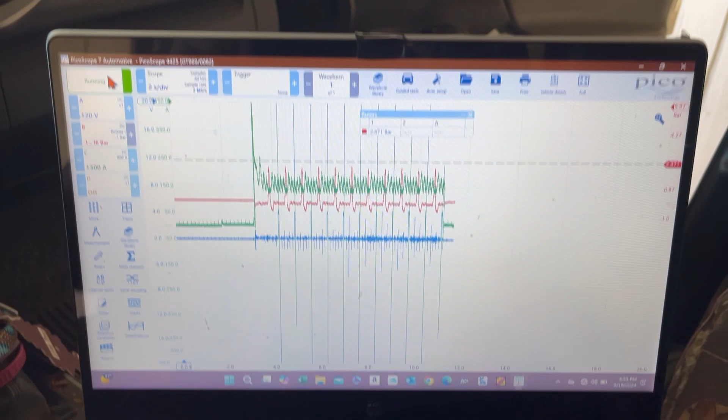Today we're talking about pressure sensors and pressure sensors in relation to misfire diagnostics.

So when would you need them? Why would you need them? Once you've exhausted all your resources and you've verified it's not a fuel issue, it's not an ignition issue, not some other component in the engine bay, and you've concluded that it's most likely an internal engine issue, well, this is where the pressure sensors shine.

When you pair pressure sensors with your lab scope, they're going to be your eyes into the engine. And this is one of the reasons I find it so intriguing. I have struggled quite a bit to gain what knowledge I have, so if I can save you guys that hassle and share something, you learn something, then it's a win-win for everybody.

I got called out to a 2019 Tacoma with some drivability issues, and I thought that this would be a good case study to just kind of give a general overview.

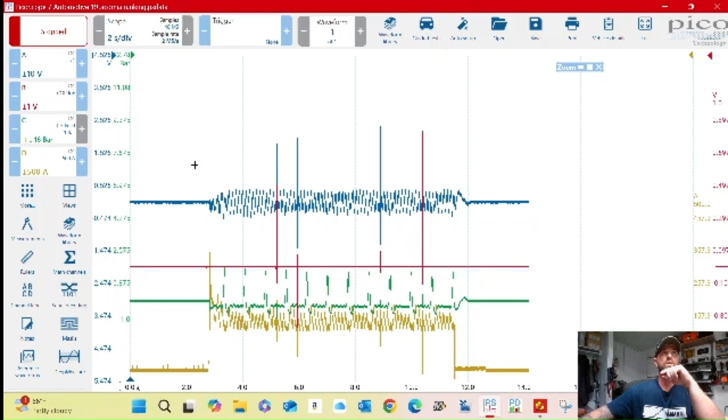The best place to start, I think, would be relative compression. Okay, so just real quick, there's a lot you can see from an RC pattern, not just the relative compression.

Let me get this green one out of the way real quick. I did want to just dabble in this. So this first part of the amperage pattern, you can see, let's see here. You can see that's my zero.

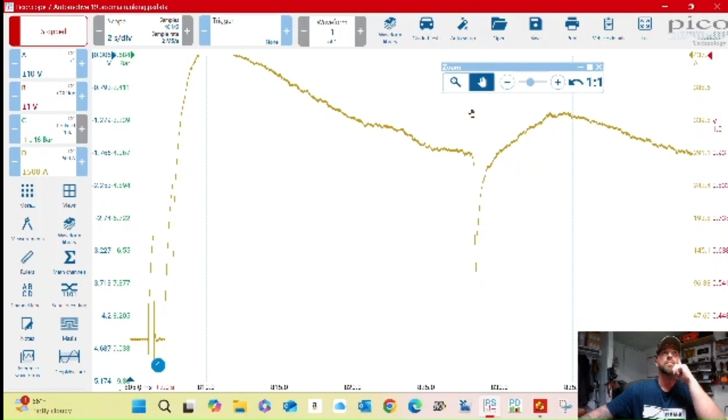Doesn't seem to be quite zeroed. Anyways, right here, that's where I turn the key on the ignition, and then right in here, let's see here. So right here, this is pretty cool. This is where you can see the starter solenoid gets activated, and then starts cranking the

starter motor over, and that's where our peak compression is going to come from. So you can measure how much amperage your starter is pulling. Just bring your cursor down there. So like right there, you can see it's pulling right around 455 amps to crank that engine over, and then the vehicle starts cranking, and then it just kind of evens out.

So that's important when it comes to the evening out. So like, somewhere, usually it's a lot more rocky, like when you're starting the car, and it kind of evens as you start the engine or continue cranking, and that's what we want.

We also want to see a repeatable pattern, which you can see here. Got all these humps. Each one of those represents a cylinder and how much amperage it takes that engine to turn at that time. So you can see here we have a very low hump,

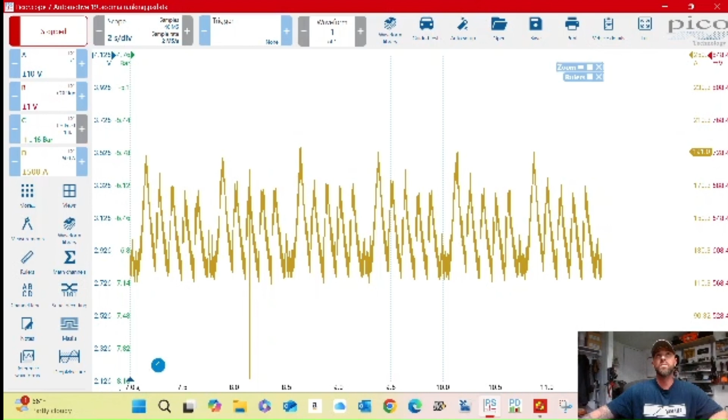Now, being as though this previous cylinder was not contributing, this cylinder, it takes more energy for the starter to get past that and keep the momentum up due to the non-contributing cylinder. So I hope I explained that part okay. I don't know.

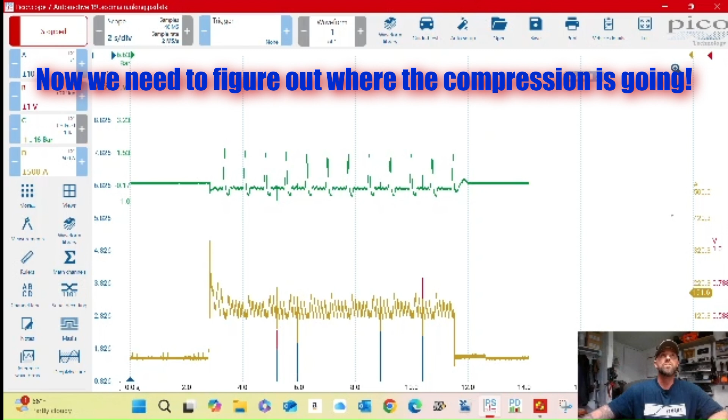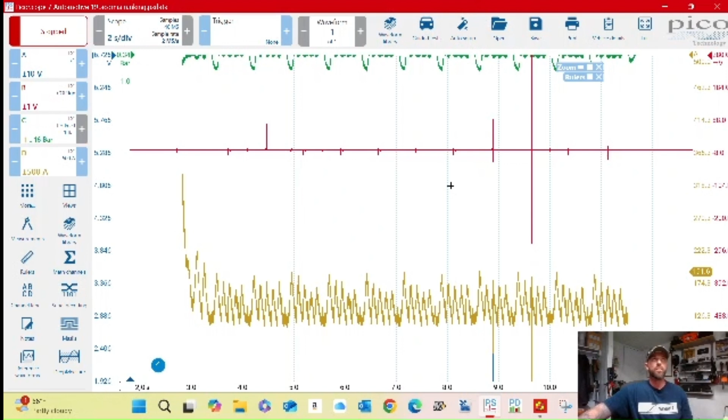So anyways, we need a sync. So that is where this ignition comes in. However, due to the fact it's just cranking and the engine is not actually starting, I believe it's just you're just seeing the waste spark here, or it's sparking 360 degrees after top dead center, but it is definitely not firing

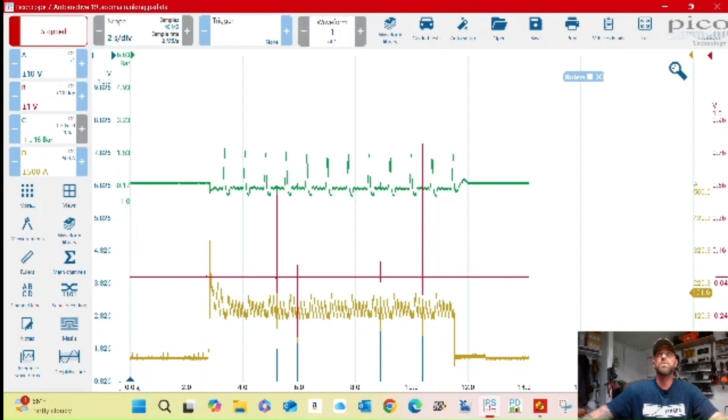when it should. This could be maybe even indicative of a timing issue, possibly, like a cam phaser or something, or it could be normal. I need to look into that further. Anyways, so we can't use that for our sync because it does not line up with the top dead center on number 5. But luckily, I'm going to turn that channel off.

And then I'm going to bring this green trace down. That's going to be our cranking cylinder. So, okay, yeah, I need to zoom in here. And then we're just going to go 720 degrees rotation. Let's get our cursors out.

Okay, now you go to top dead center. Remember, we're in cylinder number 5, so top dead center, we're going to see that on this trace here. And that aligns perfectly with what we're seeing on the RC, so

that's our sync. We're using that for now. Anyways, the firing order on this engine is 1, 2, 3, 4, 5, 6. It's pretty simple. So we got 5, 6, 1, 2, 3, 4, and then back to 5.

Now we got other cylinders with lower compression. Like I said, this engine's all gummed up. The intake valves are all carboned up, so it's gonna run rough, and the cylinders aren't gonna seal like they should.

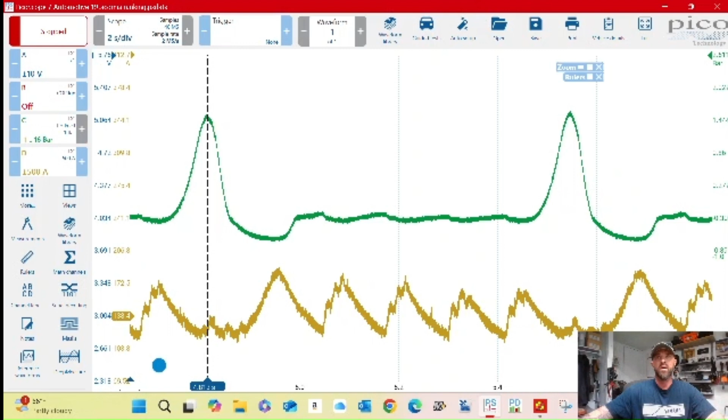So that's that. But this dead cylinder, that's different. I believe I already mentioned it, but if not, cylinder number 5, when I stuck that camera inside the cylinder, I could see that cracked exhaust valve. I'll show you guys a picture of that now.

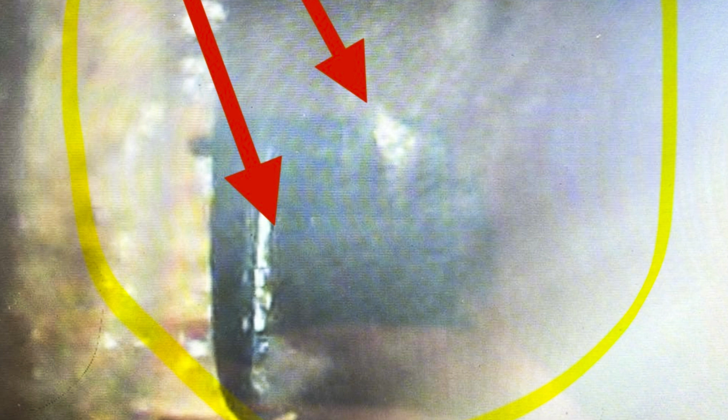Real quick, I just wanted to go over overlay programs. If you're wanting to get into pressure diagnostics, you may have seen some of the overlays people post. Well, it's really important because you need to know what you're looking at.

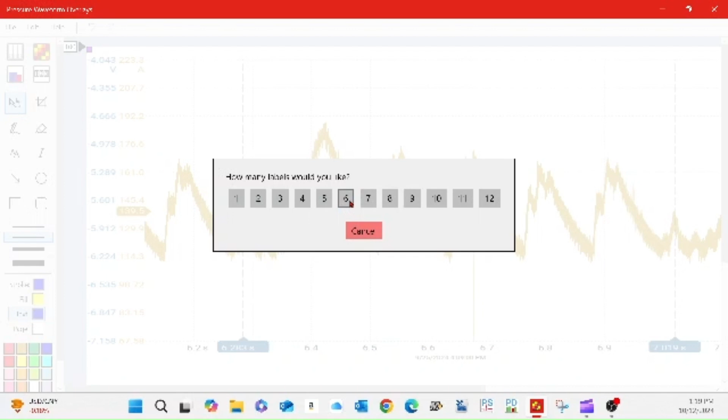You're essentially mapping, you graph it, that's great, it's saved the pattern, but you still need to know what's what. So you can see here, I clicked this 1, 2, 3 icon up in the corner, and I can move that wherever I want, but this is the firing order, so I can tell what cylinder I'm looking at.

Now, knowing our firing order is pretty simple at 1, 2, 3, 4, 5, 6, that makes this pretty easy. Remember, this is our bad cylinder, number 5, with cylinder compression loss. So I'm going to start at 5, 6, and then 1, 2, 3, 4.

Alright, so now I can tell what I'm looking at pretty easily. You can see each and every one of these cylinders goes up on its compression stroke, and then we're missing one. That's why we got the in-cylinder, and the intake exhaust and crankcase, because I want to know where that compression loss is going to.

As you can see, we'll do later, but you can add a piston chart. So we got sync on cylinder 5, 6-cylinder engine, and it's just going to ask you for the firing order.

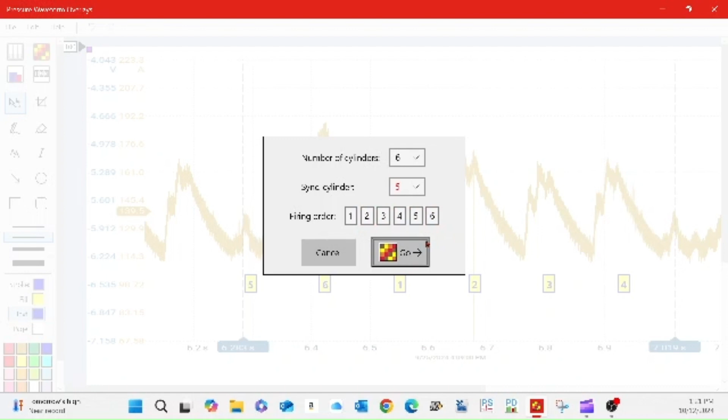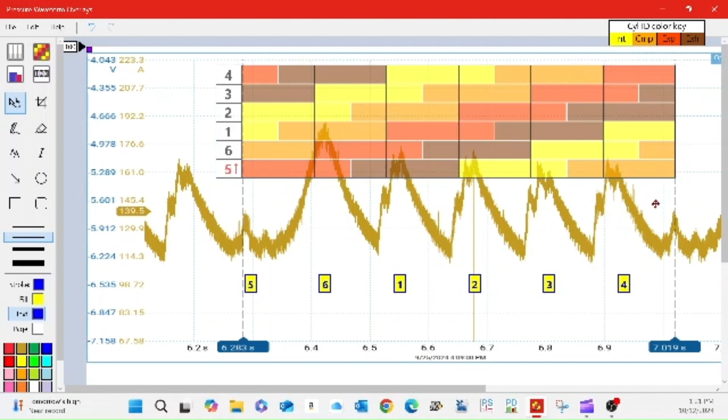Alright, so bam, now we got our piston chart, and I'm doing my best guess here just for a quick demo, but that's what it would look like. We definitely need some more information though, but that's how you get that on there.

Or I can add a memo or an arrow, so it makes mapping it out essentially a lot easier.

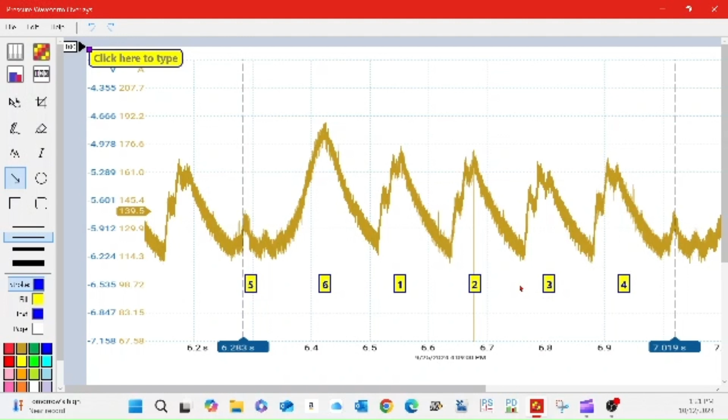Alright, so if you need that app, you can find it in the Microsoft Store, I believe. I think you can just search piston chart overlay. It's called pressure waveform overlays, and then you just want to install it, and easy peasy. It's on your computer and ready to roll.

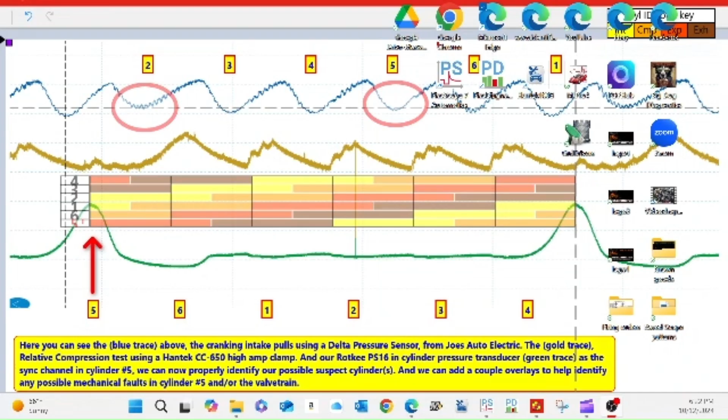Alright, so this is where I got mine, it's just RotKee, rotkee.com. You can find all kinds of, like known good patterns here. If you were to go to the library, your make and model, it'll give you some known goods.

I was just trying to show you this. So this is out of Ukraine. Usually it takes a while to get here, especially, I mean, it's kind of hard to say these days, but with the war and everything. But I've found this thing indispensable.

It's got its own voltage supply, so you don't have to worry about that. You just hook it up to the battery, and I believe it converts it to a 0 to 5 volt pattern. And yeah, what you see there, that's what you get.

Here's the sensor, and then there's the harness, and I'll try to find a picture of mine. I put a little air fitting on a little coupler so I could just quick disconnect, it's a universal one, so I can use pretty much any airline or air chuck, and it'll seal up real nice.

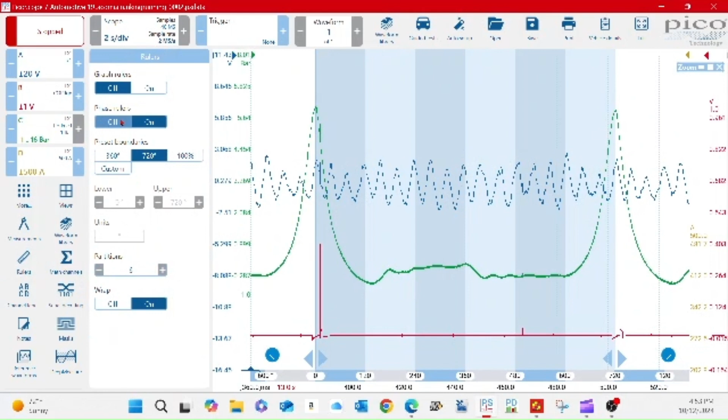So that's pretty cool. So what you're looking at here, in the green trace we got that running in-cylinder, let me just turn the ruler off for now. So yeah, what you're looking at is that running in-cylinder, and I have the intake on here as well with a pulse sensor. However, just don't worry about that for now, just focus on this green trace.

I think the first thing you'll notice is that these towers are not even. So that in itself indicates cylinder leakage, we already know it's got some issues. And then you'll notice the peak pressure as well. Oh man, I was almost dead on there. Okay.

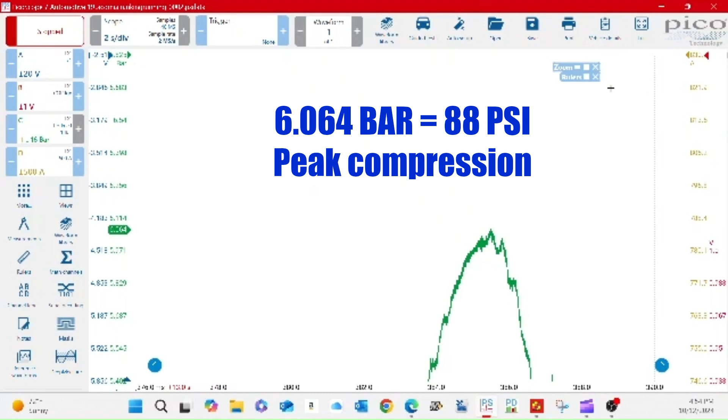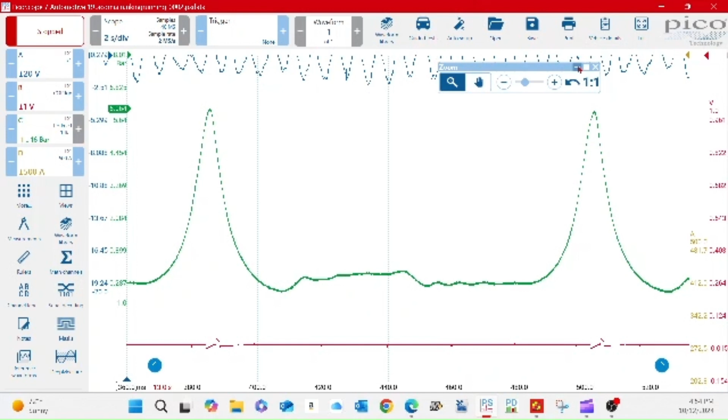So it's in bar, it's a pain in the ass, I have to convert it. You can see I put the 4-phase ruler on, so that's just going to be the compression there, and then this is the expansion stroke, this is the exhaust stroke, the intake stroke, and then back to compression.

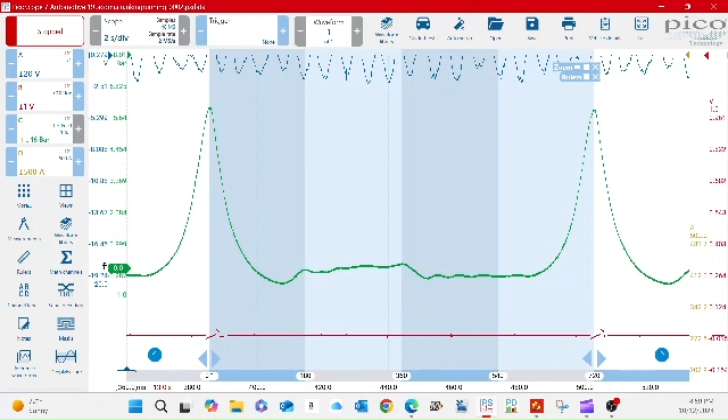So if you look right here at this big pocket, oh, let me get that zero there again. Alright, so I'm going to bring that other ruler down here. Now, like right about there, that's manifold vacuum.

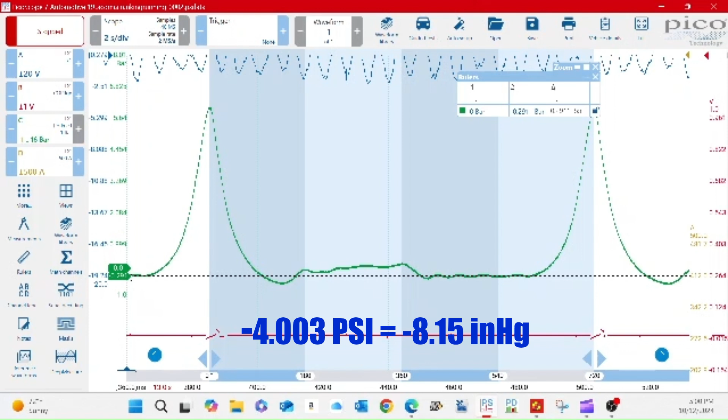That's where the intake valve closes, and it starts its compression stroke.

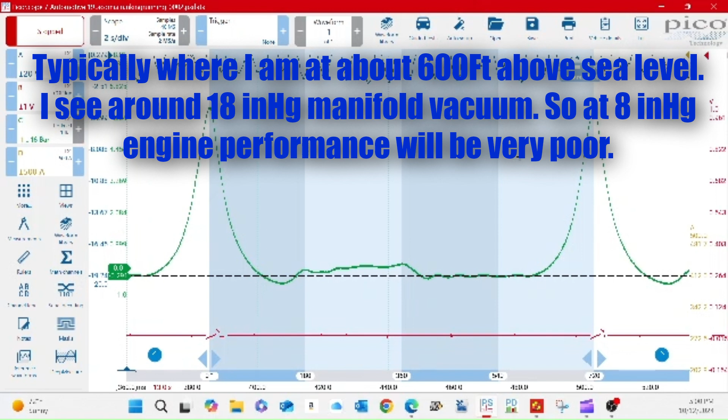So if I drag my cursor back down, we got 0.276, and that's in bar. It's negative, so that would be equal to about 4.003 pounds. But we're talking about vacuum, so if you want to convert that to vacuum, it would be 8.15 inches of mercury, and that is way too low.

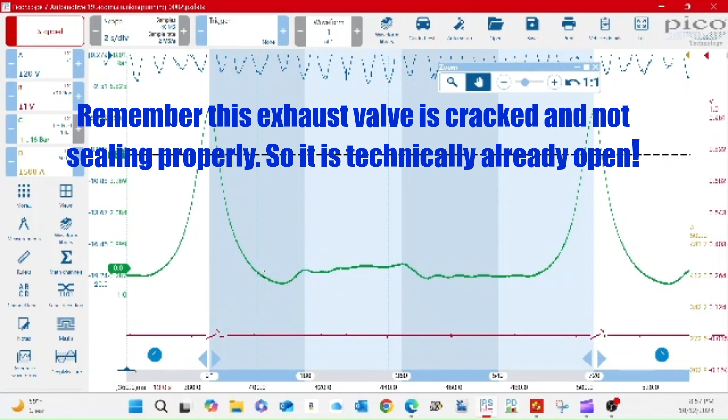In this case, we're lucky because we know that we got a cracked exhaust valve, and it's got some other breathing issues when it comes to the induction. So we get to see what it looks like with a cracked exhaust valve, and you can see that represented here, right where the exhaust valve opens.

So this is actually where the piston starts. It's at bottom dead center, and then it starts to go back up on its exhaust stroke. And then this is where the exhaust valve technically should open.

Let's get these out of the way real quick. So if you look at that pattern there, this little dotted line, and I really hope you guys can see this, because on my screen it doesn't look like you can on the recording screen. So, yeah, hopefully you can anyways. So this little dotted line, that represents atmospheric pressure. We're just at 0 psi.

Right here, okay, my cursor. All right, so about here, our piston is at top or bottom dead center. And then let's see here, we're about there. It starts going back up. Now this should be, it should be opening right about here, I believe, but...

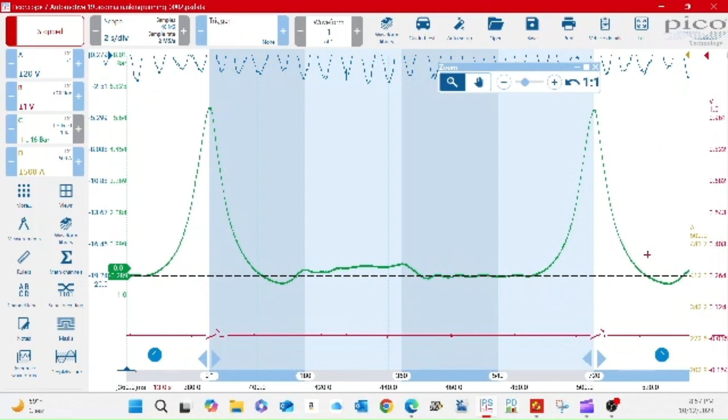That indicates we've lost pressure somewhere along the way. As you can see, that cylinder stays in a vacuum until about right here. And it's that section that was really abnormal to me to begin with, and that's what kind of got me so interested in what was going on in there, and inspired me to stick the inspection camera in there.

So there's that, and then you can see right here we have a, let's see here, it's about 2.6 pounds of back pressure. Remember, we're just at idle here, so I found it interesting that we stayed in a vacuum for over about a third of the exhaust stroke, and then went into back pressure. So that's indicating that we have a restricted exhaust, or the exhaust valve isn't opening.

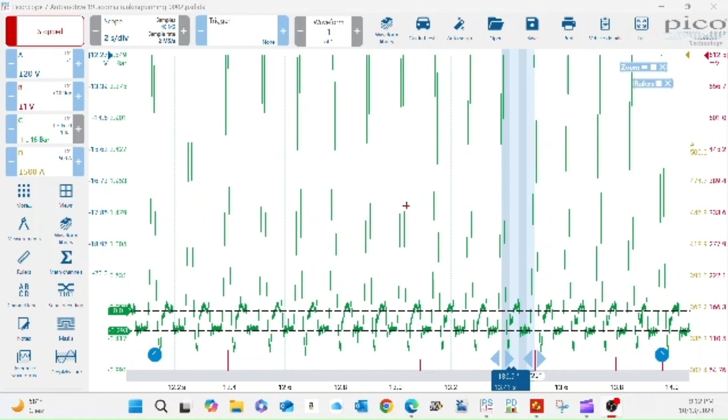You can see on this one here. So this is our zero line. So then if you take your other cursor up here, you can measure the back pressure. So that's 0.163 bar, and that would be about 2.37 or 2.38 pounds of back pressure. So it's not a ton, but you can see...

If you look at the atmospheric pressure line and then you look at the peak on the top of this, or this hump, that represents exhaust gases that are having difficulty exiting the chamber. So that's where you get the back pressure. It's, or scavenging, yeah. So it's like a scavenging effect.

And could even indicate, you know, this thing was running on a misfire for quite some time. I mean, it wouldn't surprise me if that cat is pretty fried just from all the raw fuel being dumped in it.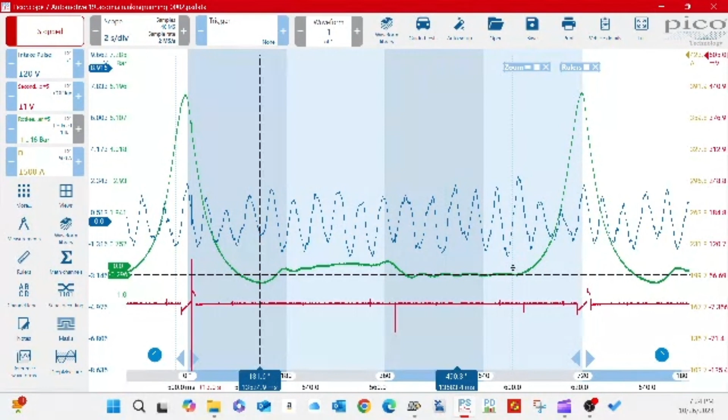Generally, when looking at an intake pulse, you're looking at the intake valves, like for an intake valve issue. And then, same goes for if you were to put the sensor in the exhaust, you'd be looking for issues that would show up due to an exhaust valve, burnt exhaust valve, or broken like this one.

So from this intake pattern, remember, first off, it's a mess. And remember that this engine is pretty carboned up. I mean, it's pretty bad. So I think that explains a lot of the pressure changes you're seeing on this intake. However, there are certain things that stand out to me. It looks like the intake and the exhaust valves are opening and closing when they should.

I can see there's a couple spots where you can especially see a disturbance. What we're trying to correlate is the rhythm and the disturbance. It should be an even rhythm, so when you have a disturbance, that indicates an issue, and that's what you're seeing here. I don't think it's super useful other than for identifying, making sure the intake cam is where it should be. And it does appear to be.

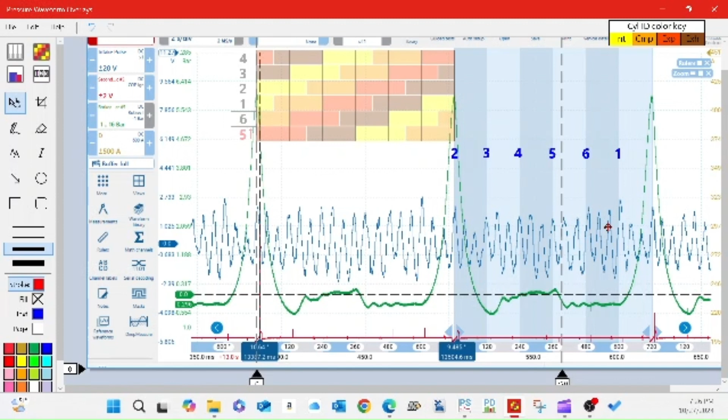Here's another one, just fast forward it a little bit. So let's see here. Take right here for instance - this is where number five's intake valve is supposed to be opening. You can see, if we take this bottom cursor, you can see how far down that pull was. And then it comes up, and this is where it's starting to seal. So you're getting this broken up pattern right about here, and then this is right about when it seals.

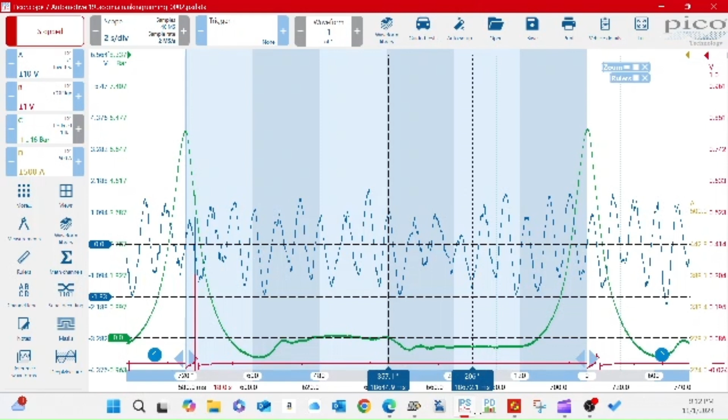So if you want to see that represented on a piston chart, you're going to see right about here, that's where the intake stroke starts. This is when the piston starts going down. So if we compare that to one of these other intake pulls, let's look at number 3 here.

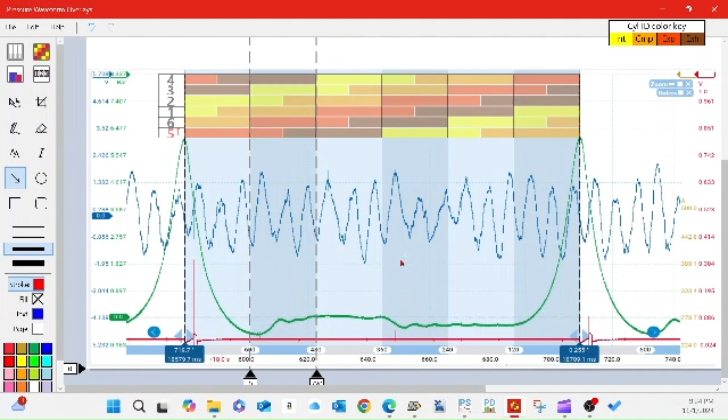I should have used this arrow over here. Actually, I'm going to go back just so you guys are clear. Right there, that is when the number 5 intake valve started opening, and then if you look over here, where will be number 3? You can see its intake valve opens right there. The piston starts traveling down on its intake stroke, but the valve doesn't open immediately, if that makes sense.

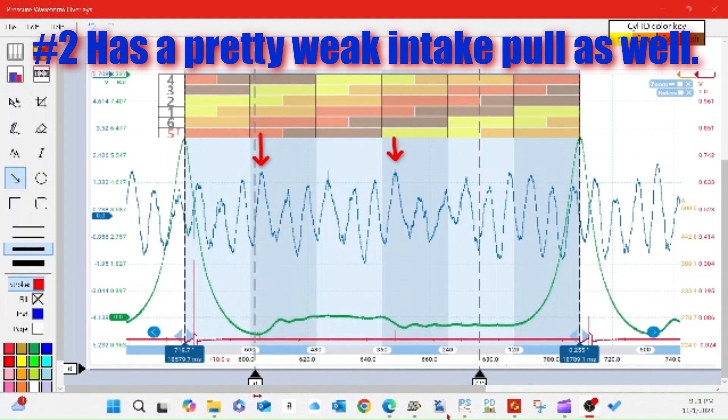So right here you got the exhaust valve open, venting into the exhaust stream, and then this is where it's coming up to top dead center, and then that piston starts traveling down. This is where the intake valve opens and introduces air from the manifold into the cylinder. So you can see the turbulence in that pattern.

This misfire, you can clearly see it represented on this pattern. Even though the intake's gummed up, you can see that cracked exhaust valve represented on this intake. When you're in overlap, that's when the intake and the exhaust valves are open, both of them momentarily. So when number 5 is going up on its exhaust stroke, at the very end, when this intake valve opens, it's pushing exhaust into the intake and diluting the intake.

And remember, number 5's exhaust valve was never really sealing because it's cracked. So when that piston starts going down on its intake stroke, and remember, when we're talking about vacuum, we're talking about the manifold vacuum right in here. So when that piston's going up on its exhaust stroke, and then it's supposed to seal, and it doesn't, this cylinder starts going down on its intake stroke, and it's sucking air in, but it's also sucking exhaust in. So that's also going to dilute the pull.

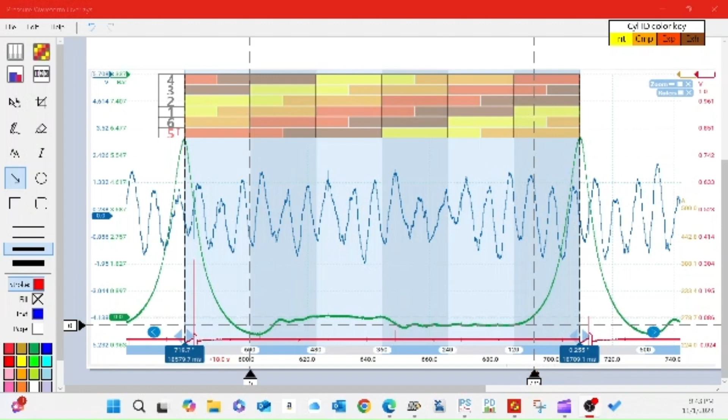The fact that this engine's so gummed up, none of the cylinders are sealing 100%, I don't think. There's so many issues on this engine, you could sit here all day and just pick it apart. I believe that the timing chain is a little loose on bank 1 - it seems to be kind of fluctuating issues. I believe that exhaust valve's cracked for a reason. I was talking to another buddy of mine on one of these Facebook groups, and he was saying, well he's a Toyota tech, that this is a pretty common issue - the valve seats fall out, and or they rattle loose, and they can cause a lot of damage. So I think this engine kind of inhaled some metal - that cylinder has more than just simple fix issues. This is gonna be a major mechanical teardown. So onto the exhaust.

So for this reading, I simply just put a tube, like a little rubber hose on the sensor, and just put it into the exhaust pipe. And they're incredibly sensitive, so it picks up all the pulses. It's honestly pretty impressive - these sensors are incredibly sensitive. So let's get this on an overlay.

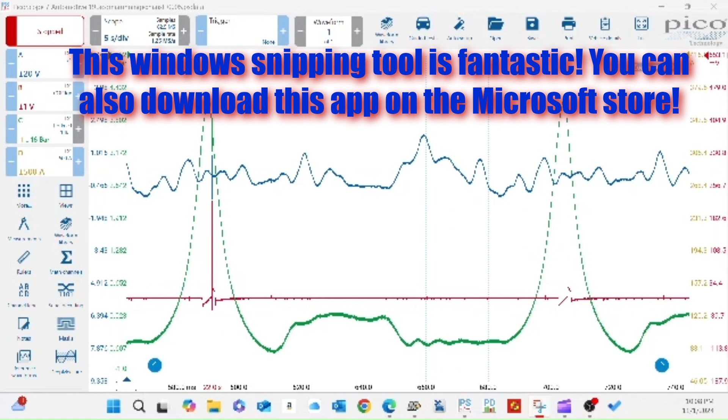Oh, it's really big. Okay, let's see here.

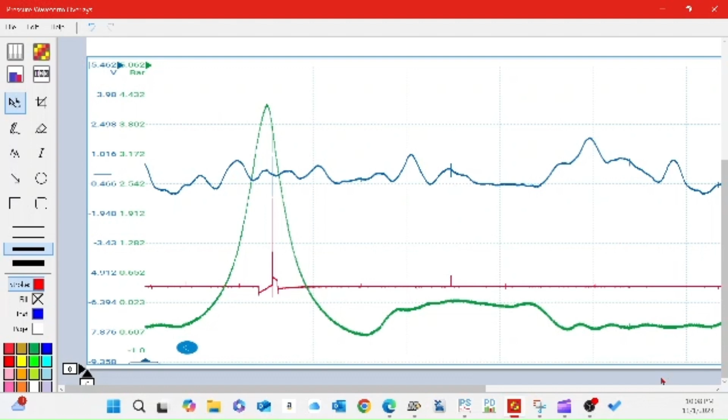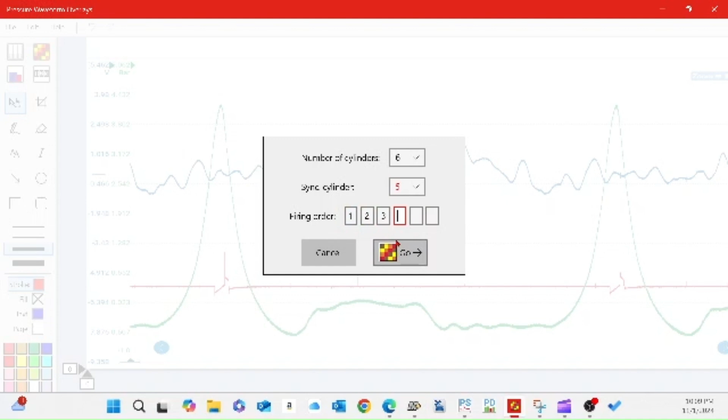Cool, so that's the piston chart. We got 6 cylinders, sync on 5. Firing order: 1, 2, 3, 4, 5, 6. Easy.

When putting these overlays together, I like to set it up on this side as that piston comes up to top dead center, then pull this side over, and you want it to line up right here where that arrow is with the 5, not at the edge.

That's pretty good. So you can see this is where the exhaust stroke starts, and this is where the exhaust valve starts to open.

You can see, well, you can't on this overlay, but if you come down here, oh yeah, right here, if we get this... oh wait, I have the wrong one on. Well, let's zero that one too.

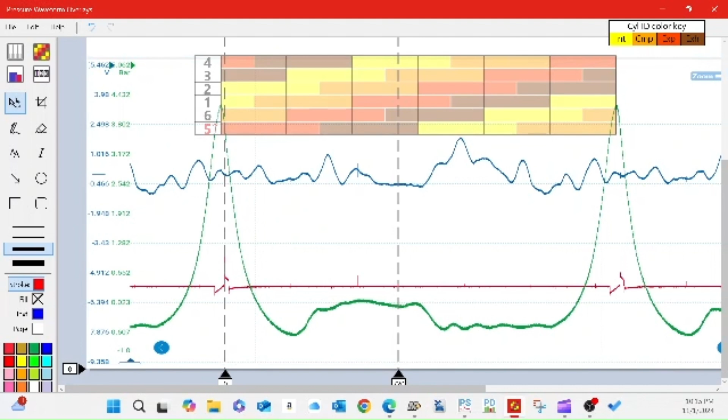It's interesting too because sometimes you can see right here where the spark plug fires, and it's late. Well, let's get back on the Pico so you can see. So you can see this ignition timing here - we're firing roughly 8 degrees after top dead center on the compression stroke there.

So sometimes it's firing before top dead center, sometimes it looks right on the money, and then sometimes it's like this. I have it on a spark plug tester, so it's firing outside the cylinder - that might have something to do with it. It probably has a lot to do with it, honestly.

But I don't feel like my ignition timing, any of my timing measurements, have been super accurate thus far. I mean, I can see that it's in time, the engine's in time, but I believe it's got a sloppy chain, like a stretch chain or something of that nature.

Some people like to look at it inverted, and honestly, to me right now, that looks better. You can see right here, this is actually where the exhaust valve opens, and you can see that represented right there, the change in direction of the pattern.

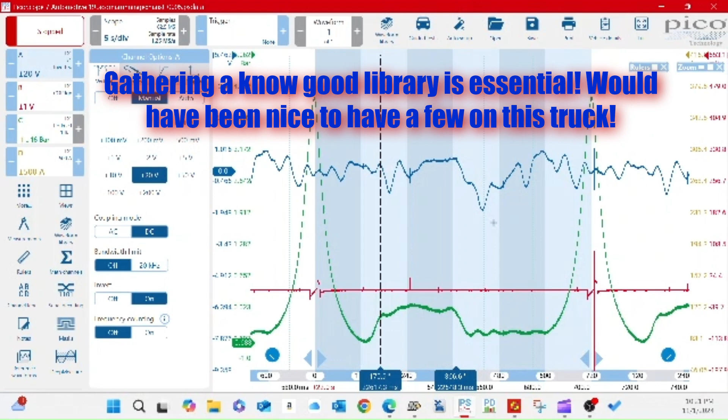However, right after, you can see this vacuum pocket, so that's going to represent a misfire. And then right here when the valve closes, you got another misfire. So it's pushing exhaust into the intake, and this engine's not happy.

So this may not be the best case study to present all of this, just because there's so many different issues, but I still thought it'd be interesting to go over, so you guys could see what this Toyota 3.5 looks like when it's just royally effed.

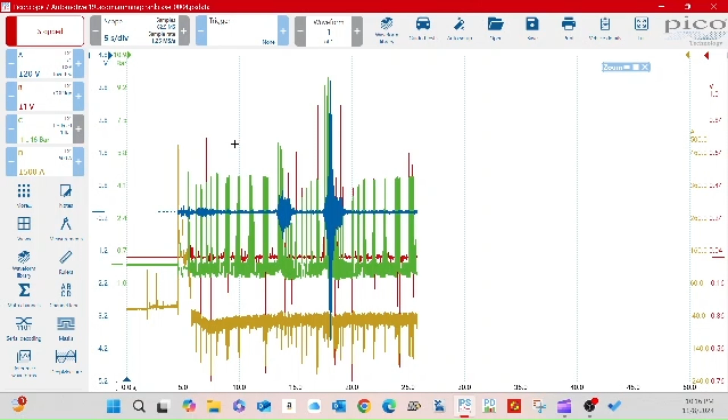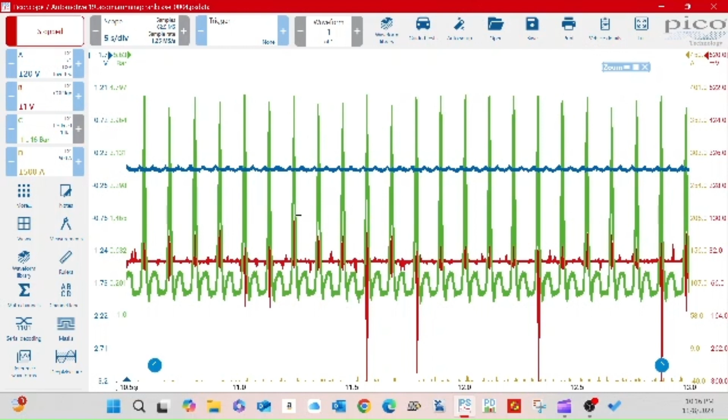So onto the crankcase, and we got some interesting things going on here. I kind of wanted to save this for last, just because we're talking about bottom end issues, and I wanted you guys to just kind of visualize what was going on up in the valve train.

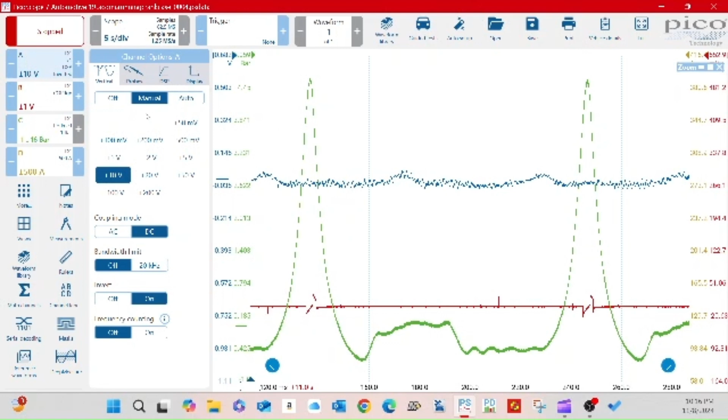There was a lot going on in that video. So you could see that repetitive pattern - let's just try to blow that up a little bit. And I have a filter on.

If you go up to the DSP here, you can turn it off or active. Even off, you can see it really well. I mean, you don't need the filter, but sometimes I just find it easier.

So what's going on here? Each one, you can see this kind of flat line, and then you got a pulse here and a pulse here. Well, that's going to be crankcase pressure, so you're getting pressure past the rings in one of the cylinders. So we got to pinpoint it.

If we zoom out once again, let's get the overview. You can once again see that repetitive pattern. So that's what you want to see. And then really, you just pick anywhere you can get a clean capture and zoom in. As you can see, that's very repetitive.

So we need to figure out which cylinders are contributing. Now remember, when we're gathering this pattern, we are connected to the crankcase via the oil dipstick, so any blow-by from the rings, that's where you're going to see it.

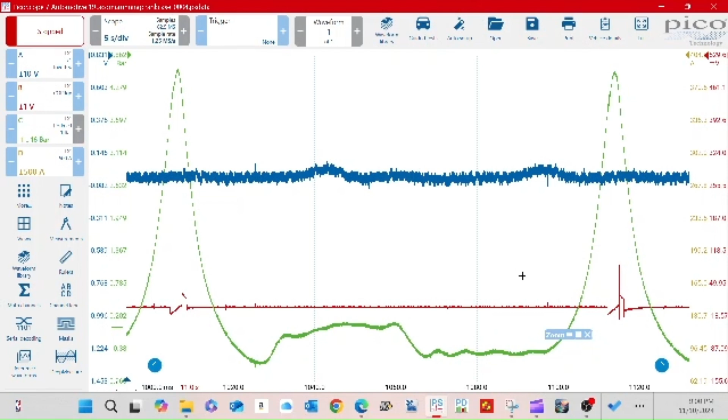Anyways, let me get some overlays on here. So looking at this piston chart right here, you can see, if you look at these humps right here, that's going to be the pressure in the crankcase, the pulses.

So you can notice that lines up perfectly with our compression stroke on number 5 here. Actually, you can see this is where the piston starts to go up, changes its direction of travel. Well, actually about right here.

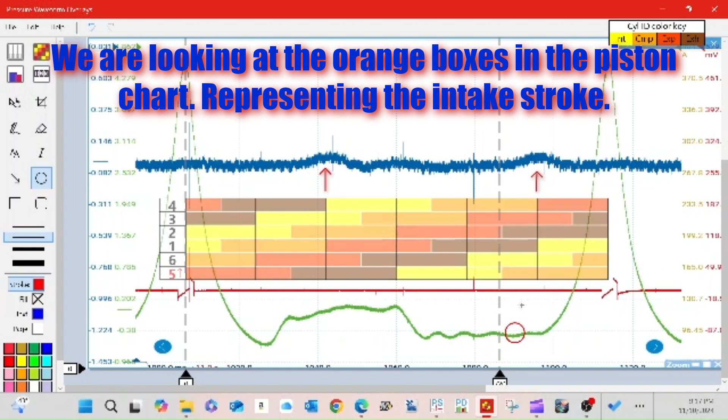So as that piston is traveling up on its compression stroke, you can see right about here as the piston starts traveling up. If you look at that blue trace on number 5, where that arrow on the right is, you can see the gradual increase. That starts right when that piston starts going up, and yeah, that's what that represents.

And then the same thing goes for cylinder number 2 over there. So let's see here. Right about here, that's where number 2 starts its compression stroke, and you can see it's the exact same as cylinder number 5. You got that little hump. So cylinder number 5 starts its compression stroke right about there.

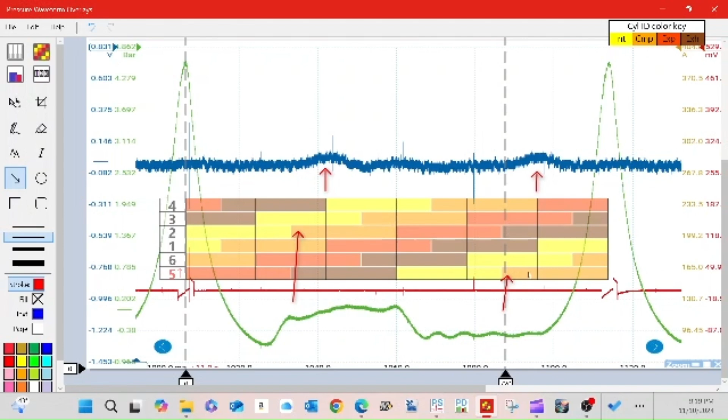So I think I'm going to wrap it up there. I covered quite a bit.

I can't thank you guys enough. There's so much good content out there that if you really just look and apply yourself, you can find this information, and you too can diagnose cars with these methods. Sometimes these non-intrusive testing methods can save hours of teardown time, or engine replacements, or the list goes on and on. What you can do with the lab scope is phenomenal if you apply yourself. Pretty much anything you can think about testing on a car, you can test with a scope, and you can do it quicker and more reliably.